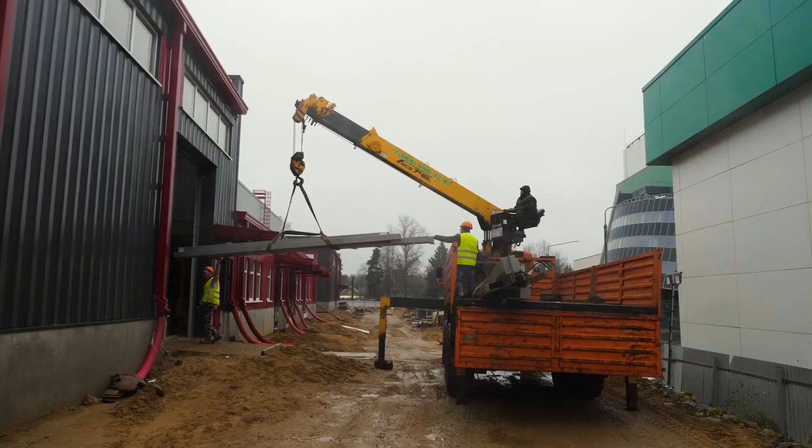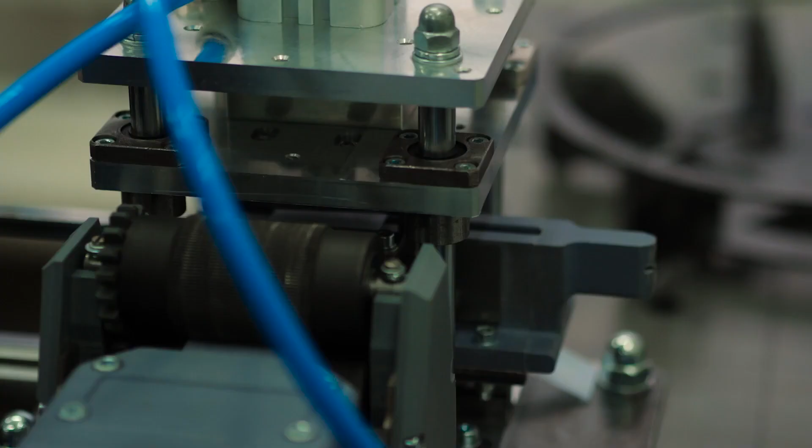Alexander, what does Sovelmash produce? Nothing. Let's start with that. Thank you very much. Goodbye, see you soon.

The point is the following: Sovelmash first of all develops induction electric motors and puts them into production. So yes, there is some production, but it is rather small series production, not mass production currently. That is the full cycle of interaction of the company and the business, when we develop the necessary motor for the client, when necessary we develop the controller, we create the drive, the traction drive for electric motors - induction electric motors.

Let's get to where we are and what is happening here in this particular lab. It is a very important place, the experiment pilot area, where prototypes are created, the first specimens of motors that we will soon sell to someone, or not.

You have the technology of induction motors that there is nowhere else in the world. Well, it's rather windings. So you want to sell the possibility to a person to produce these motors with all the equipment.

Yes. Why? Because as of today, according to Business Stat, a company that carries out statistical research, the world produces about 10 billion motors annually. The fleet of electric motors in the Russian Federation is 90% worn out. The fact that motors need to be replaced is evident. And now there is a serious trend towards creating energy-efficient solutions: IE1, IE2, IE3, IE4 classes.

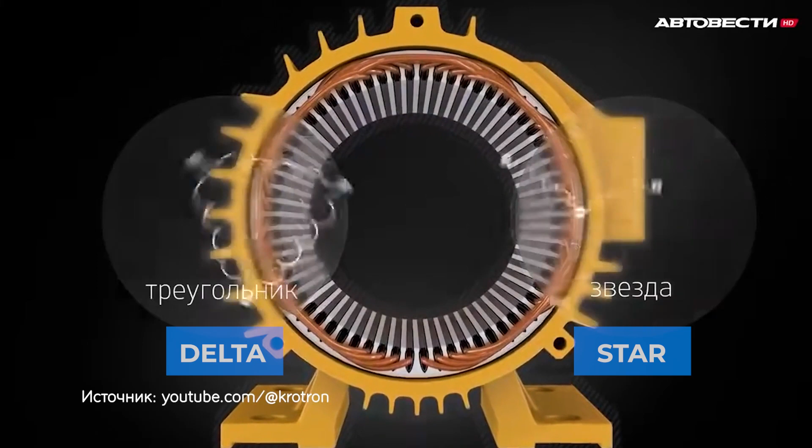Copper here, copper there. And the difference is in connection. When we speak about classical ones, we say it is either the star or the delta, 2 types of windings, right? In Sovelmash's case, we are using the technology of combined winding Slavyanka, parallel connection of the star and the delta.

We use 2 windings at the same time, and it gives better properties to the motor. Better power, energy efficiency, reliability, which is also very important. And what I'm saying is not something ephemeral. It has been confirmed by the good functioning of hundreds of thousands of motors and their potential.

Can we show some graphs, some comparisons? Yes, we do have such graphs. We have protocols of trials which show the difference between different motors. Some of these materials are published on the website of the company, sovelmash.ru. We also have a reference book devoted to combined windings. You can acquire it, there are graphs, there are different materials. You can just take it and look at how it works. And we also have a forum of winders where winders themselves provide information on that.

And when I was saying that there are hundreds of thousands of motors operating in the world, they're not just words. They are motors which have been wound by our winders. We have about 100 licensed winders who work with modernization potential.

And when winders started to use our scheme, many entrepreneurs, those who tried it, are not now using the classical scheme because it saves them money. They reduce energy costs over the year, and entrepreneurs can spend this money on development or take this money as profit. Dmitry Alexandrovich, can you please tell about the technology itself, how it appeared, how it was invented?

In 1906, it was said that there was the possibility of creating a motor which would have both windings, the star and the delta, the 2 sets. And over that time, very few successful designs have been created.

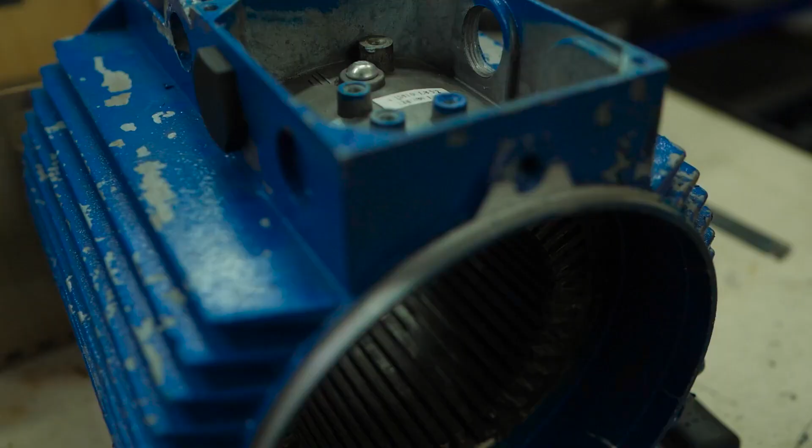Well, you may think that today I will ask very silly questions, but I will do it on purpose, for everyone to understand, for me to understand what is happening here, and for viewers who are far from this topic to get closer to it as well. Alexei, you are doing something with a lot of enthusiasm. What is your job here?

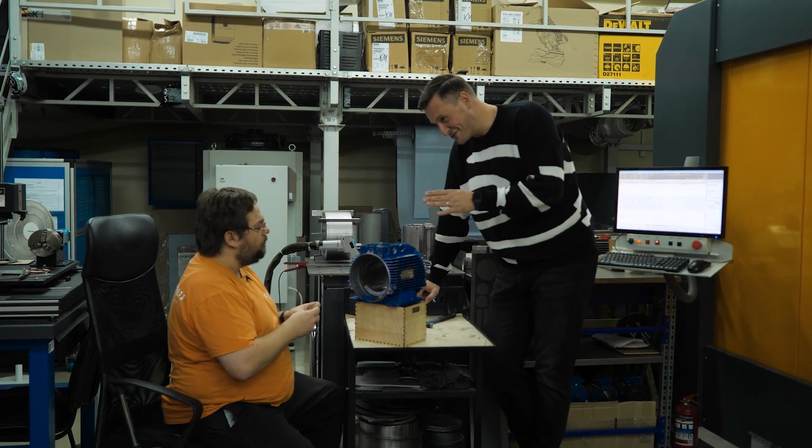I am operator of laser equipment in Sovelmash, and I have a lot of parallel tasks to solve as well. Winding, grooving of the electric motors. I help guys in the studio, taking part in exhibitions, Army 2022 for example. I've been there as well.

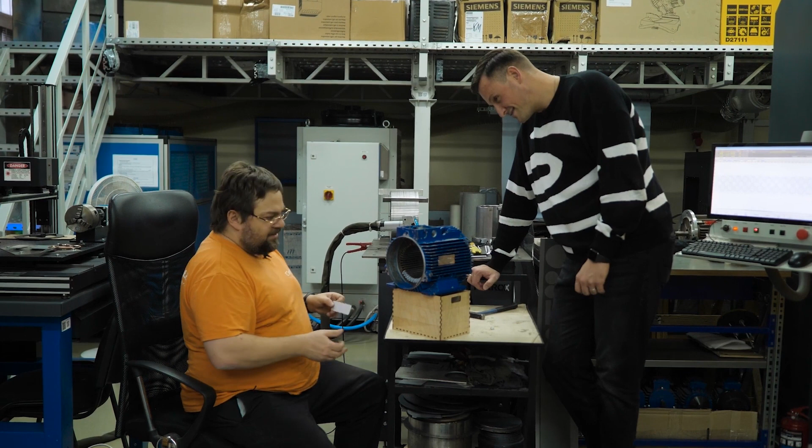We put one on each wheel of the armored vehicle, so we put a pair like that, a motor and a reducer, and the torque was 1000 Newton-meter on the wheel, which is sufficient.

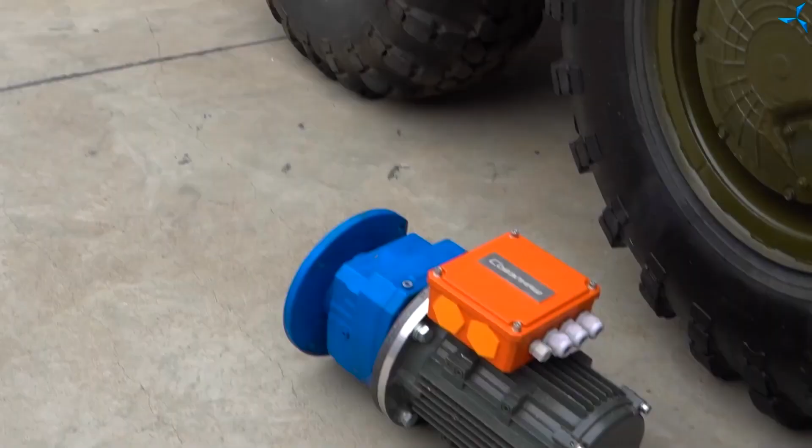And when we brought the armored vehicle to the exhibition, there were many such vehicles there, like BTR-82, and ours was pale and not very beautiful. Then I asked advice from the management, and in 15 minutes we removed that pair from the armored vehicle for people to see that it was electrified. And then people started to ask questions.

And what was the effect? There were a lot of skeptical people. They were asking, why do you need electricity in military equipment? I was saying, okay, I will just provide you with 5 reasons, 5 answers why we need to electrify the vehicles, and you will subscribe to our YouTube channel for that. And they were saying, no, it's not possible. I said, okay, no noise.

A stationary little power station, lowered infrared trace, maintenance characteristics. You just remove a reducer from the vehicle within 15 minutes. The electric motor has different properties which are proven. Explosion proof. We want to put a battery from mine electromotives. Many advantages, and the range from 800 to 3000, because the tanks are original.

It will be a hybrid. There is already the electric station, it feeds the battery, and the battery feeds each wheel by its algorithm. And is recuperation possible? Of course. One of the subscribers wrote to us that recuperation is just lies, because there are no magnets. How will that recuperation happen? You, as someone working with that, how will recuperation work?

A standard version, in an induction motor, there are 3 windings, the delta and the star. So, if for example we take one phase of 6 and we supply battery tension from a little accumulator, then we remove tension from the other 5 phases. One phase will operate for magnetizing, and the rest of the system will recuperate the energy. And is it proven? It works. In generators and windmills, all powerful electric windmills, they use induction motors.

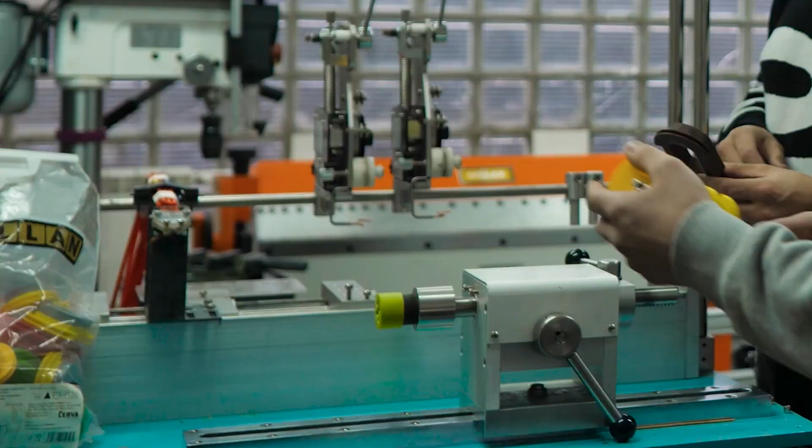Where you design the future automated line to produce motors. Automatic line, absolutely. We see prototypes. This is our first winding machine, it has already been modernized by us. It is part of an automated machine to assemble a pack of stator, motor wheel, hoist, and other products.

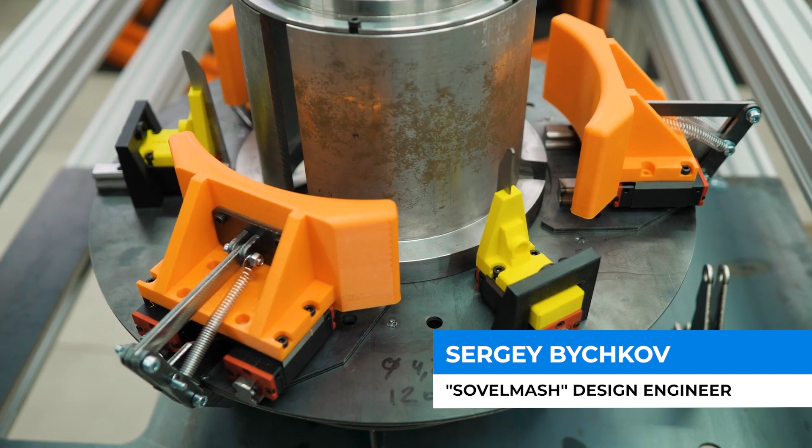Based on that, we're trying to use the most modern technologies. One such controller can control a big technological automated line. We had to learn that, go to programming courses for us designers to understand it. It is one thing to design something, and another thing to understand how to unite it all together, because in automation there are many sensors, many motors, many cylinders. All of that has to work in a united way, in harmony.

The controller is a Russian controller, a good one. I can recommend it to everyone.

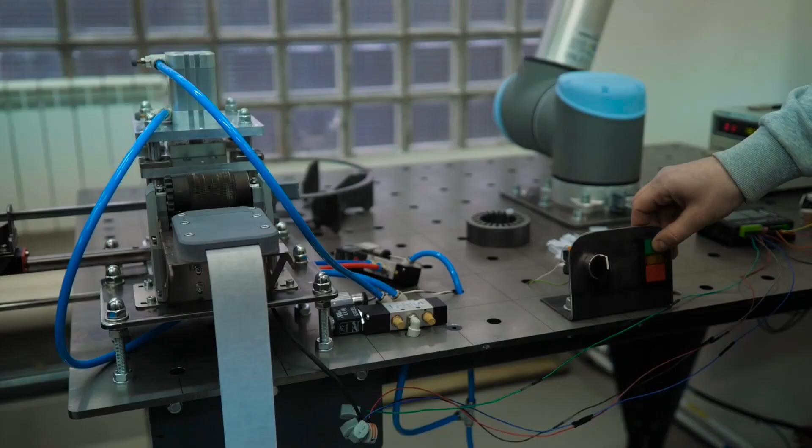Apart from the institute, the scientific institute, do you sell anything? Do you produce anything in series, more or less? Well, we are now on a straight line before we launch series production of electric tools. The motor is small, it is a part of it, a rotor, quite small.

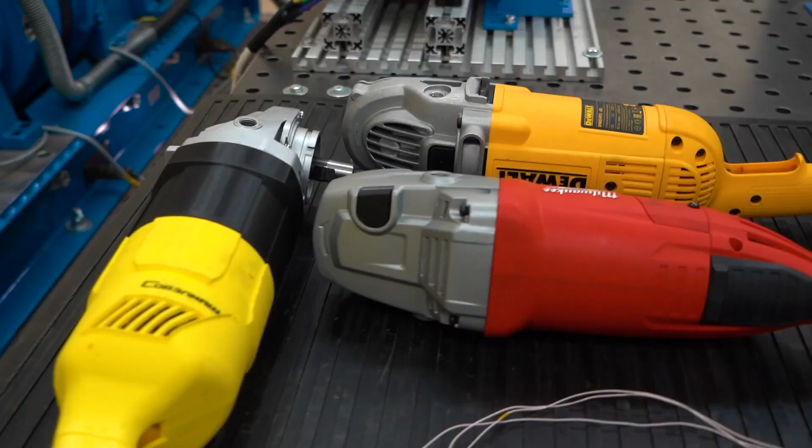They will now bring a stator to us as well, I will take it. This is Slavyanka. It looks small. This motor fits different equipment. In this case, we start with producing angle grinders, a 230 saw. It is an example.

The casing has not yet been cast, it is our geometry. We have been using additive technologies - well, 3D printer, in simpler terms.

The motor has been produced. The bearing, the head, the reducer, all of that is Chinese, from angle grinders of good companies. And now they will write again, why does Russia not have any bearings? Let them write it, I want to hear the answer as well. Why are there no bearings? We would buy them.

We have done that, now we will test it. It is prototyping. This is the motor which was there. No, they did not bring us the right one, it is a motor from the trimming saw. It is our motor, and by size, this one replaces this one. What's interesting, our motor fits into both the angle grinder and the trimming saw, and the vacuum cleaner, and the high pressure cleaner.

This motor can reach 2 kilowatts. What's the idea here? It is combined winding. The windings are combined, the motor is light, compact, and it runs at 600 Hz. It works inside the controller that has also been developed by us using our mathematical calculations and technologies.

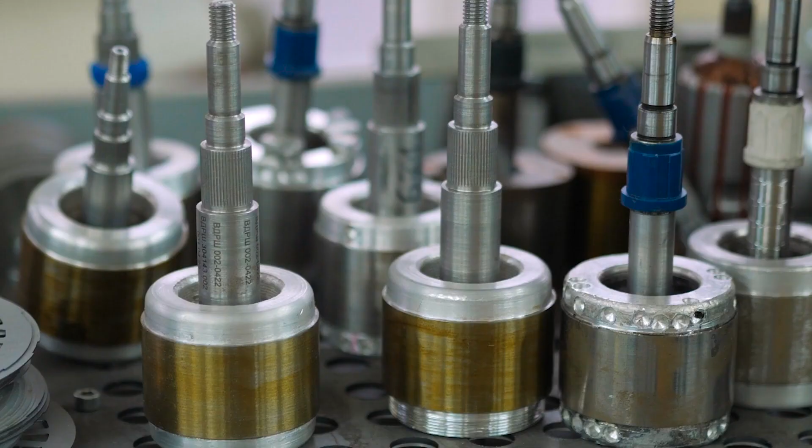As of today, our project is abundant with big capacities. A laboratory has been created. It's considered one of the best, according to producers of metrological equipment, Magtrol. Thanks to this laboratory, we can now say that yes, this technology is working. It has its place under the sun, and it's better than other technologies.

What's the paradigm now? There exist different classes of efficiency: IE1, 2, 3, and 4. IE4 is the highest energy efficiency. As a rule, if we take an IE1 motor, say 2 kilowatt, and we need to get IE4 class, this motor becomes bigger, longer, a whole size up. Our technology allows the following: you take an IE1 class motor and make an IE4 class motor in its same casing.

You know, they often ask questions. There was a big wave of hate because when people start to study something and get deep into it, they find information that there is SOLARGROUP. They are the investor of this project. Not the investor, they raise funds. At the same time, the company is not registered in Russia.

It is an offshore company, registered in, I don't remember the name of that island, Vanuatu. So it acts under British law. Why was it done that way? Do we have legislation for such schemes in Russia? No.

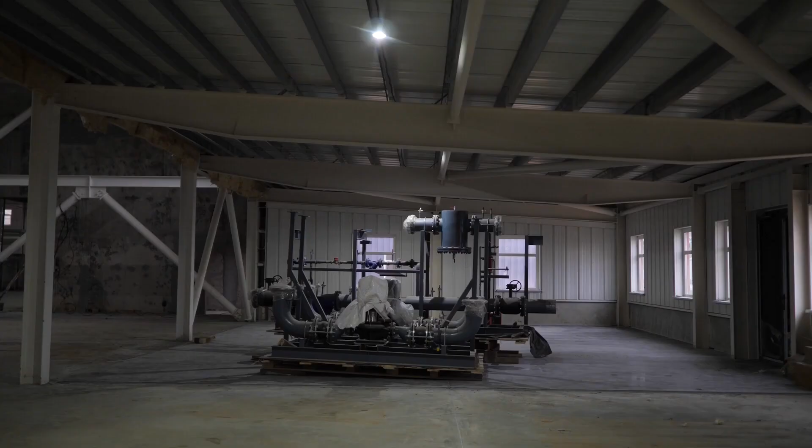This place, it's been more than a year since construction started, more than 1.5 years, and you are in the special economic zone Technopolis Moscow, or Alabushevo, right? And despite the fact that it is a special economic zone, you still had to obtain your construction permit. Absolutely. How much time did it take? A lot, because we had to go through state commissions.

Look, when we had our first money, we started creating the pre-project. It is the description of what we want. And then, based on that pre-project, we started to draw our project. We developed it, we went through commissions, many things. This building, you know, we had to calculate what would happen if a plane dropped on it and damaged the structures, what would happen in this case.

There were many, many things. It was quite a funny thing. You can imagine what it is.

It's the first time I hear that in the special economic zone it takes so much time to validate a project. We spoke to Kaliningrad producers. Kaliningrad is an economic zone itself.

And it takes a month maximum from signing the contract. Which project are you talking about? Some time ago, smaller projects. Yes, there are standard projects and standard solutions, but this building is unique. It is built for the tasks which we'll solve here, and so on.

Plus, if you visited plants that produce electric machines, maybe you heard the noise of presses, but here there is a lot of vibration. We're now on the floor. It is like an aerodrome plate, 6 by 9, cut into fragments, with a cushion of sand 3 meters, a multi-layer structure. It is done to assure precision of processing.

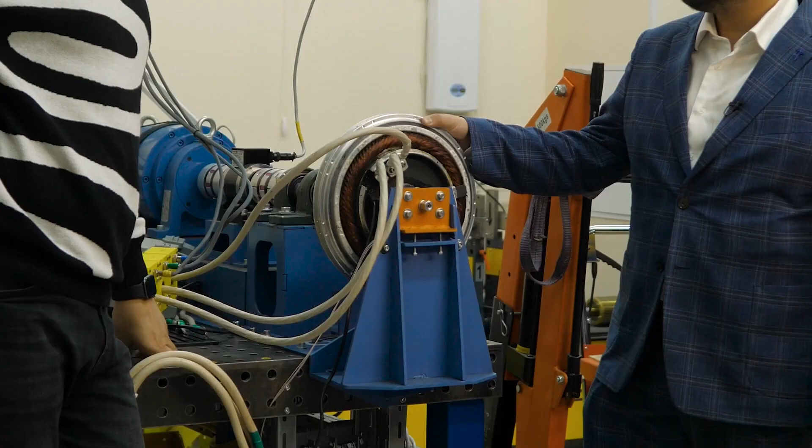What is interesting about this motor? This technology of creating motor wheels is the basis of the direct-driven lift hoist. Here the pack of plates is 35mm, and in the lift hoist it will be 60mm, 90mm and 120mm, depending on modification and capacity needed.

So to get to the things which are in demand now, we had to show the possibility of producing the constructive part of the induction motor wheel, which was done. Then we needed to practice the technology of series production, something we are finishing now, and create the direct-driven lift hoist based on that.

We can test it and show it, right? Well, we will not show you the results yet, it is a commercial secret. Until that moment we will definitely show it to you, but later. This particular product, we will do it in some time. Now we are working on creating a series prototype.

Alright, now haters have an excuse to write their messages full of hatred. But they have to do their work as well, they need to win their bread. They will write things like, you're not showing anything.

Now, where are we actually? Where is Sovelmash now? Because it is on different floors. We are in Zelenograd. It is a scientific institution building, the Research and Development Institution of Precise Machine Building. You know it better than myself. I'm well prepared. All the space is leased.

We're actually creating a miniature of a Design and Technological Bureau. The Design and Technological Bureau is the facility we're now building in Alabushevo, in the Special Economic Zone Technopolis, Moscow. So everything you see here now is the process of getting ready in advance to commission the Design and Technological Bureau as quickly as possible. Because if this work had not been done, and if we had not spent money on it, the launch of the Design and Technological Bureau would not have been possible in the time we're speaking about.

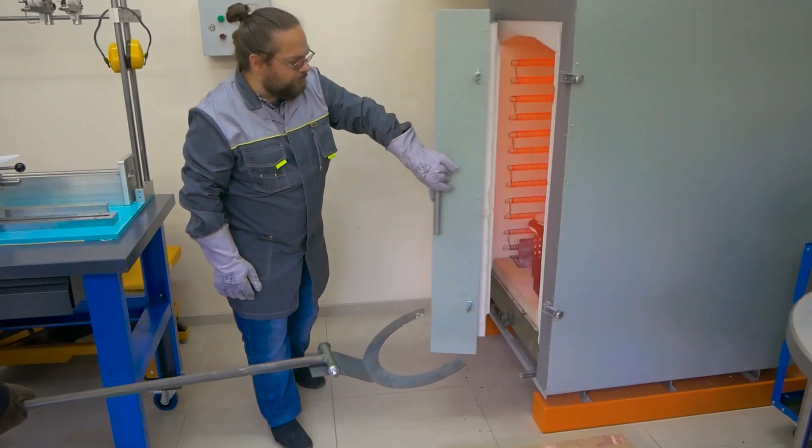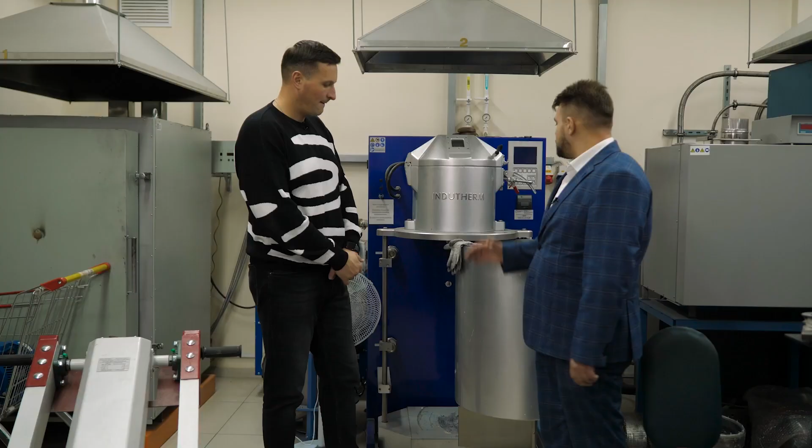This is the shop floor of mechanical treatment, together with the casting one. It is very compact. Why? Because we are very limited in working areas. What can you see here? Workplaces, working benches, a little pressing machine, but the most interesting thing is what we have here.

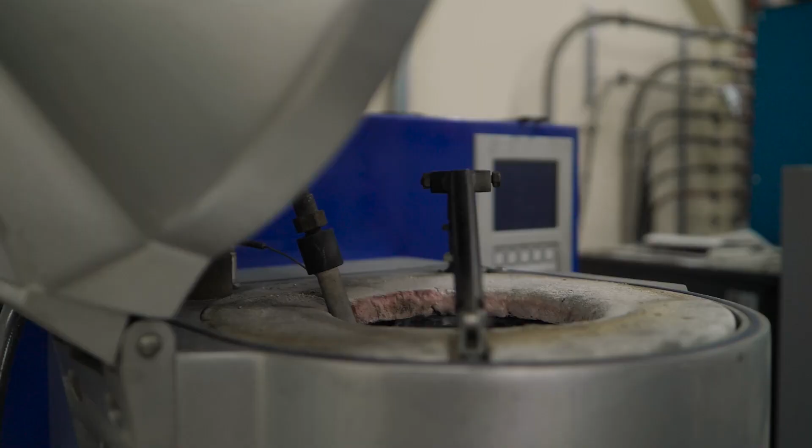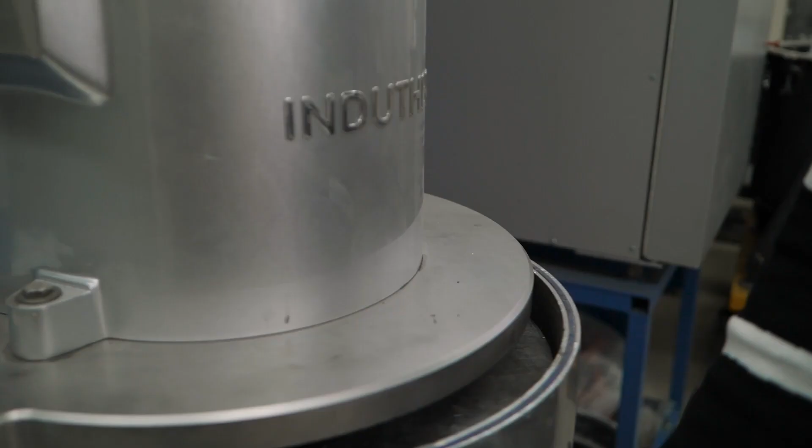A machine of casting under pressure, in an oxygen-free medium, in vacuum. At the current stage, we pour our short-circuit rotors with aluminium. Here we worked on the technological process of pouring itself, of casting itself. The throughput capacity is quite low. That is why we are now creating a different casting installation that you can see now.

It is also an installation of casting under low pressure. It will be the lower pressure. There will be a special mode where casting will be performed. And the melting pot will be something like 60 liters, depending on the tasks to fulfill. We can produce different installations, set them up, and produce any volume that we will need, of course, in reasonable limits.

So, on the territory of all the leased areas, we now mostly improve the technological process to create automatic production. Let's take this.

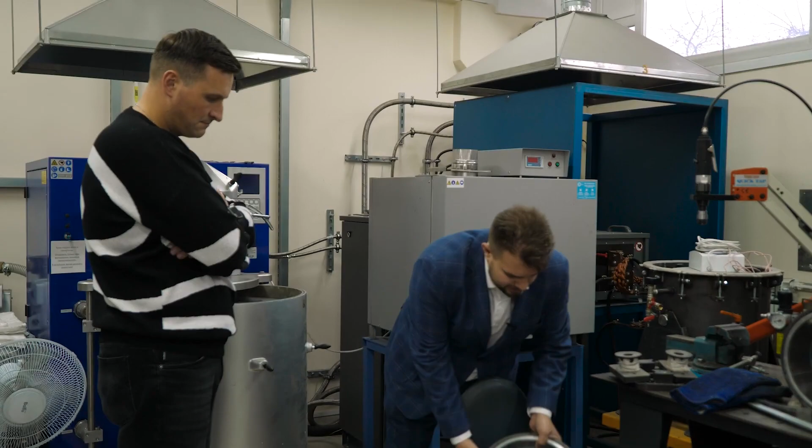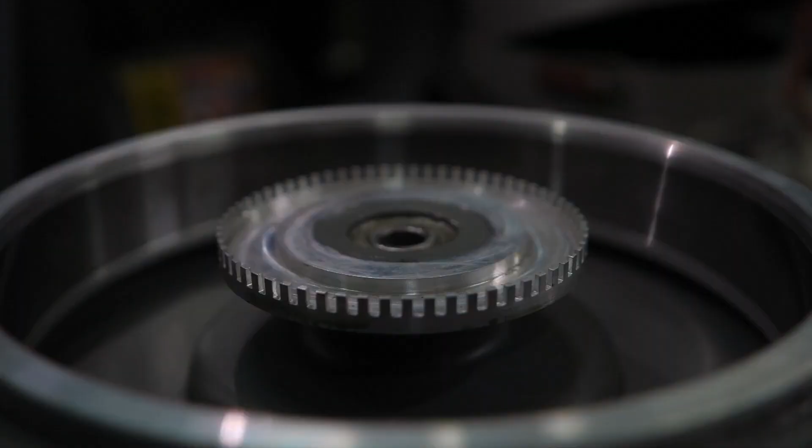Before, when we produced development models, instead of aluminium, we had copper here. Copper is heavier and it is more expensive. And if we speak about casting of the rotor now, which is made of segment plates, which is also very important, before it was a copper circle, 1, 2 rods that we put here, and they were brazed. So automatic production was something utopian. You could not set it up for it to be profitable as well. That motor wheel would have cost like the nuclear cruiser Aurora.

By the way, what about the cost? Of course, now the cost is lower because the processes are improved, but the final cost we will be able to provide when we set up the line and start producing it. It will depend on... And now you cannot buy your motor wheel.

No, you cannot. Somebody wrote in the comments, why do Chinese actively sell them? It is our partner, Viktor Arestev, ASPP Weihai company. Yes, they produce kits and you can buy them without a problem, together with the controller. Or you can buy the ready-made equipment, a motorbike. Okay, we have it already. So in China, they have already set up serious production.

Using your technology, yes. Using the modernization potential, we took a classical Chinese motor, classical material of a stator, a rotor, we applied the combined windings and we'll sell them. But here we speak about a different technology. It's a totally different process, and the results which we will obtain here will be ahead of those ones.

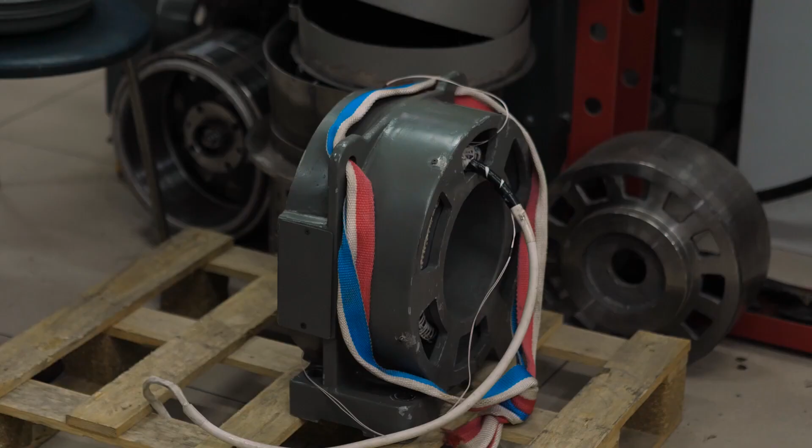Lift hoist, part of it. It is disassembled, we're working with it now. It is very new, something which was developed by us. It is casting of the box according to our 3D model, so it is our casing. We ordered casting from another company. Here we see the package of the stator, the rotor. It is also installed there.

The pulley that we will buy as well, because we cannot produce all the elements, it is not the right thing to do. Bearings, of course, we will buy them as well. And so we get a great product. The brakes will also be installed. And now the lift hoist is being tested in different ways in the laboratory. The next stage is testing it as part of the bench scale lift.

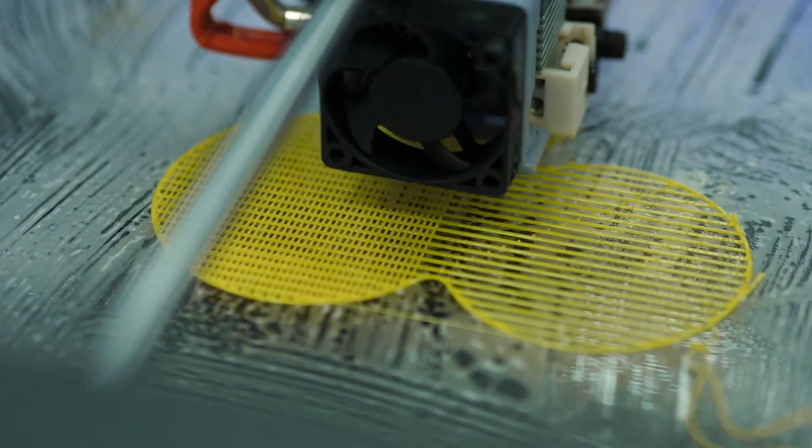It is the design department. There is some creative mess here. What do you do here? What is happening here? You make prototypes from scratch, right? Using the 3D printer and small parts as well. Not only small ones, I see some big things there as well.

Speaking of automation of production, it is part of the fittings, from automatic drawing of windings. After the coils are wound on such fittings, the section is transferred here, between these rods, and then the cylinder draws in windings inside the grooves of the motor.

So before we have not even a machine but the prototype of a machine, you first do it with a 3D printer. And we have had them, by 2020, and it can make the process much cheaper. Right, it makes it cheaper and it speeds it up many times. Of course, sometimes we remake parts several times, dozens of times. It is rare, but still it happens.

So designing of the machines themselves, it is your task as well. How long have you been working for Sovelmash? For 5 years.

Actually, it is quite an interesting story. I was on an electrical trade, and I love cycling. And back then I was studying. My department was electric drives and motors department. So I thought, how can I combine my hobby and my specialty to work and get pleasure in my work? I started to do search on the internet, and then I found Duyunov's motor. Back then, there was just a group in VK. I entered it and I saw that they were located in Leningrad. And it was time for me to do my internship somewhere.